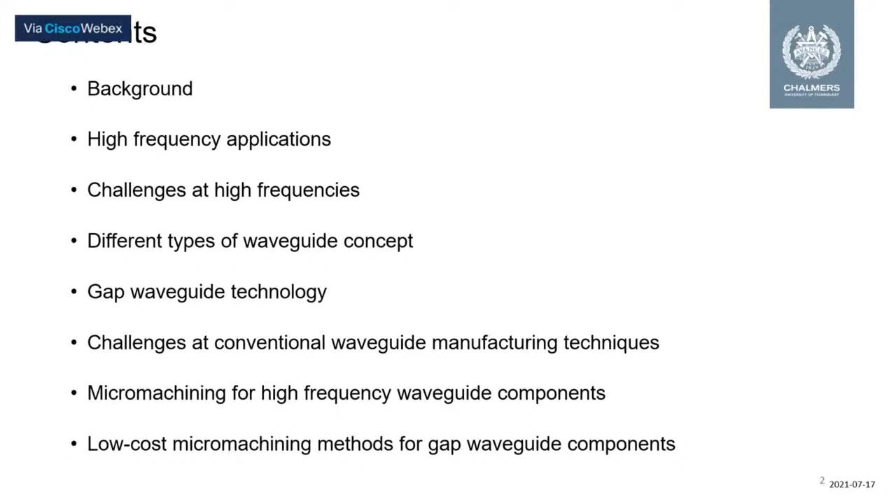So, Internet of Things. This has become a very hot topic these days. By Internet of Things, we mean devices connected to each other and connected to the internet. The number of devices connected to each other and to the internet is growing day by day. The present situation is an enormous number of connected devices, enormous growth in data traffic, and profound impacts on daily lives and social activities of human beings.

But the challenge is that the RF spectrum is already crowded at microwave frequencies. At the same time, there is a wish list from consumers: we want low cost products, compact and smaller wireless modules that we can carry everywhere and anywhere, high reliability and best performance, no limit on data rate, and connectivity everywhere.

So we can see that there is a contradiction between the present situation and the consumer's wish list. To get connectivity everywhere and to control these enormous devices connected to the internet, we see that microwave frequencies are kind of overcrowded. That's why we are approaching towards higher frequencies.

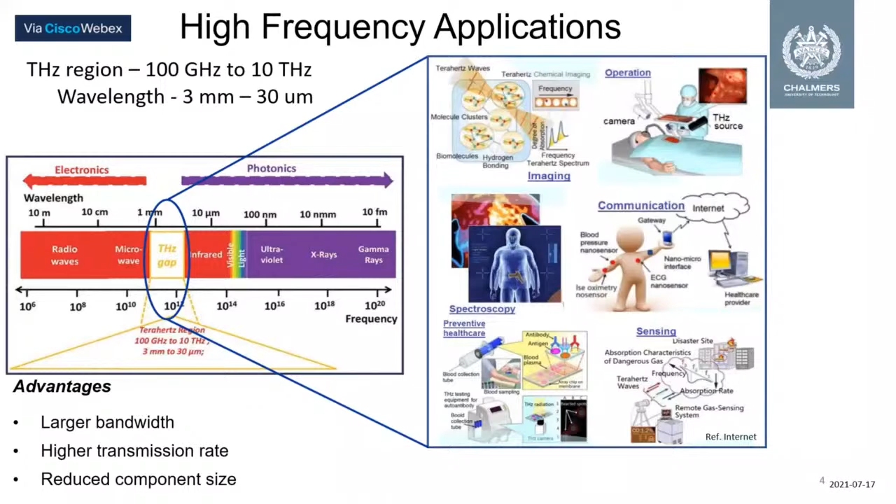But as soon as we move towards higher frequencies, we start to use waveguides to transmit waves. The most commonly used or very known waveguide is the hollow waveguide, which is rectangular or circular waveguide. People working with these transmission lines know that we have this rectangular waveguide and hollow waveguide everywhere in our measurement labs. It's a very established technology.

It offers very low insertion loss, but the challenge starts when we approach higher frequencies. Because this hollow waveguide needs very good electrical contact and alignment between metal split blocks, it becomes very challenging for conventional machining methods to get this type of electrical contact and alignment, which makes this waveguide technology very complicated and costly.

There is another very known waveguide concept, which is planar transmission line. The most commonly used planar transmission lines are microstrip lines, and we are also familiar with coplanar waveguides. They are very simple to manufacture, planar, and a very low cost technology.

But the problem is, at higher frequencies, it suffers from dielectric material. This dielectric loss is very high at high frequencies, and it also suffers from conductor loss due to narrow lines on thin substrate.

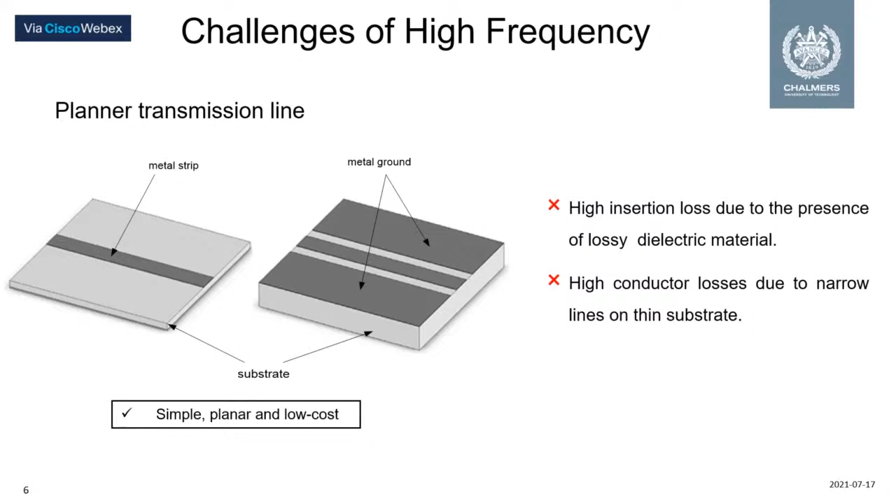After that, considering those issues, there has been developed another waveguide, which is substrate integrated waveguide or post-wall waveguide. So instead of connection between two metal plates, this waveguide technology uses metal vias to get a connection between these two metal walls. But this waveguide technology is mostly dependent on dielectric material and also suffers from dielectric loss.

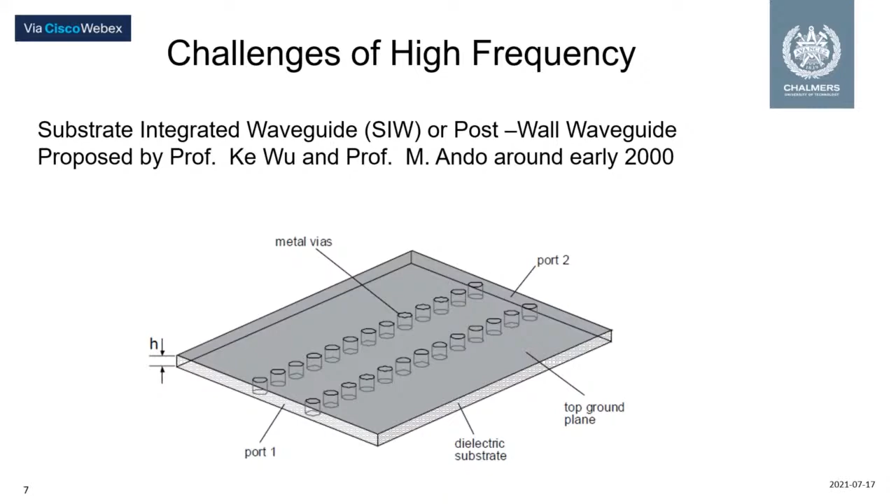So there are some issues: the waveguides that can offer low insertion loss become very costly and complicated to fabricate, and on the other hand, the waveguides that are very simple to fabricate suffer from high insertion loss, which is very difficult to use for higher frequencies.

So then the newly proposed waveguide concept is gap waveguide technology. It was proposed by Professor Per-Simon Kildal in 1988. He actually proposed this waveguide technology based on hard and soft surfaces.

So what is a soft surface? A soft surface is a corrugated surface which can stop the wave from propagating. So if a wave tries to propagate in the transverse direction, it will see some discontinuity between this ridge line, and then it cannot propagate in this direction. But in the longitudinal direction, this wave can propagate easily, and in this direction, this soft surface acts as a hard surface, which can be used to propagate a wave.

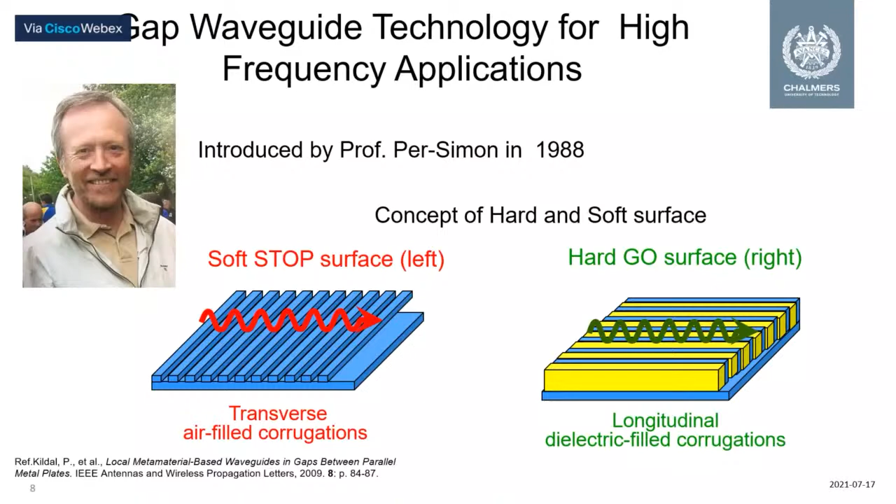So this is the main concept of gap waveguide technology. But there is some other concept also being used, which is a very basic theory of electromagnetic wave.

If we consider an electric conductor, then electromagnetic wave cannot pass through an electric conductor, but it will reflect. Any electric field that touches an electric conductor must be perpendicular to it. On the other hand, a magnetic field close to an electric conducting surface must be parallel to it. And the rule is completely opposite for a magnetically conducting surface.

But it is difficult. So then, from this concept, think about this parallel plate configuration: if we bring an electrically conducting surface and a magnetically conducting surface placed parallel to each other, then no wave can propagate through them due to this boundary condition. But it is difficult to get the perfect magnetic conductor in nature.

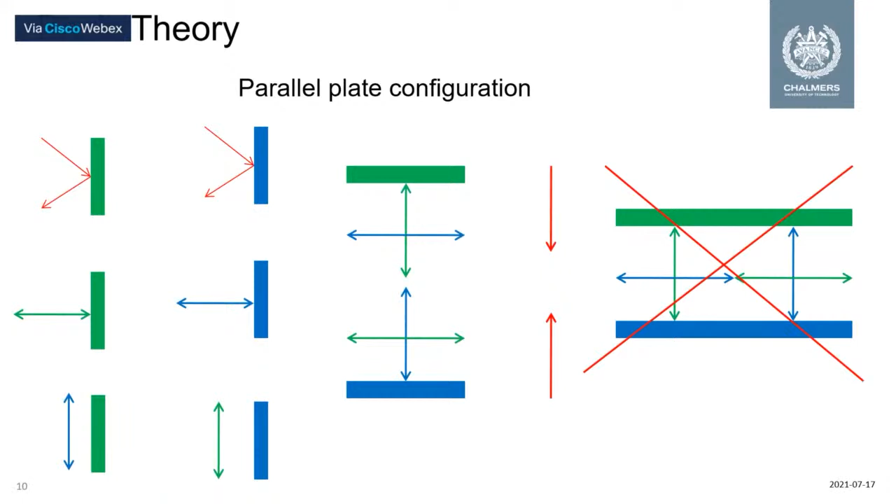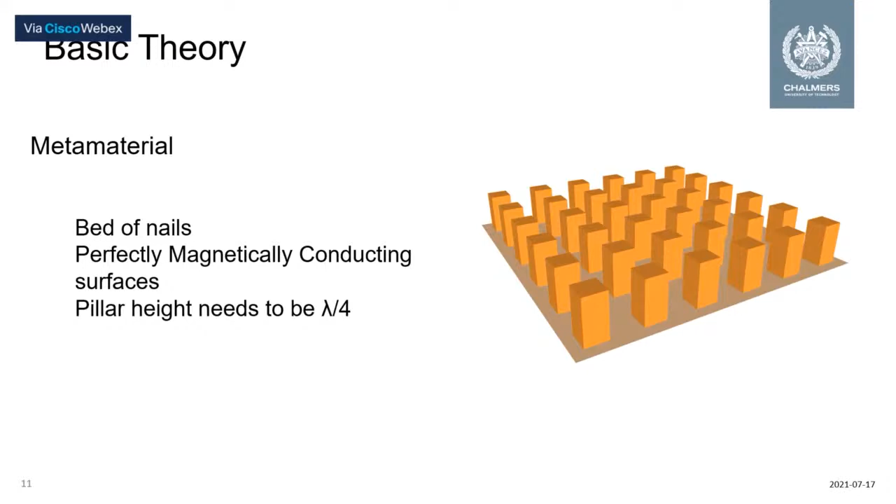But that can actually be fulfilled by a metamaterial concept. A metamaterial is a surface where continuous rows of pins can be placed at a certain distance, and the pin heights need to be a quarter wavelength. Then this surface can act as a magnetic surface.

Based on this concept, he proposed the gap waveguide concept. If we place a perfect electric conductor and an artificial magnetic surface parallel to each other with a separation less than quarter wavelength, then no wave can propagate.

But if we put a metal strip in between these two magnetic surfaces, then the wave can propagate only through this strip. As mentioned before, this metamaterial surface acts as an artificial magnetic surface, and this pin structure acts as a soft surface. So no wave can propagate through this direction, only through this ridge.

The benefit of the gap waveguide concept is it doesn't require any electrical connection between these two metal plates, because due to the soft surface, there will be no wave leakage. Wave can only propagate through this ridge. So as it doesn't require any electrical connection between the top and bottom metal plates, it has manufacturing flexibility.

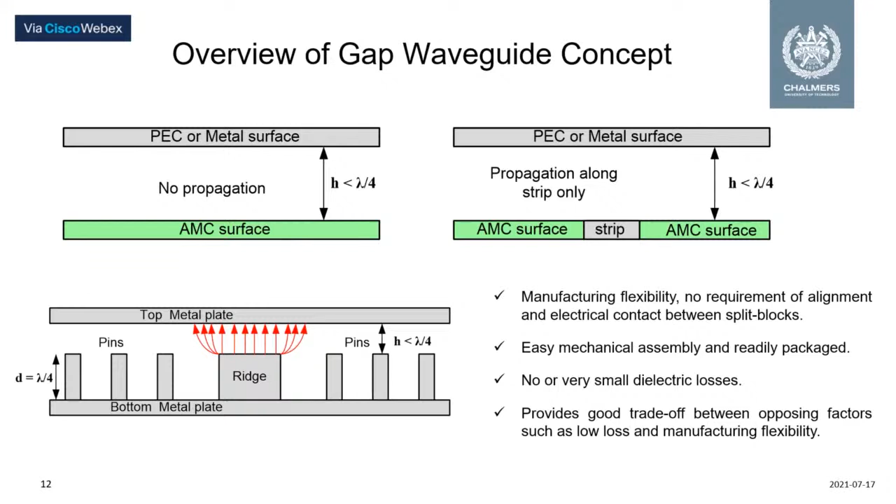Also, it doesn't require a very strict alignment. So the manufacturing is very flexible, easy mechanical assembly, and readily packaged. No or very small dielectric loss is suffered by this gap waveguide structure, as the wave basically propagates through air. Also, it provides a very good trade-off between opposing factors, which are low loss and manufacturing flexibility.

In my research, I mainly focused on ridge gap waveguide and groove gap waveguide.

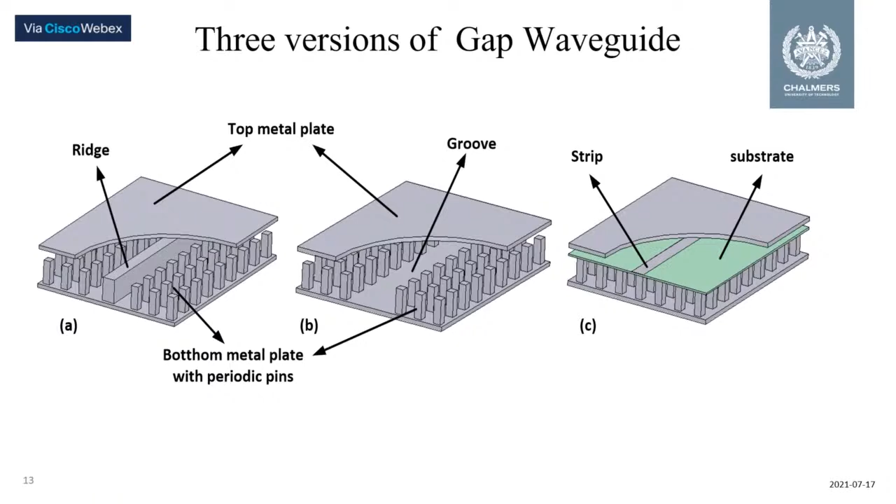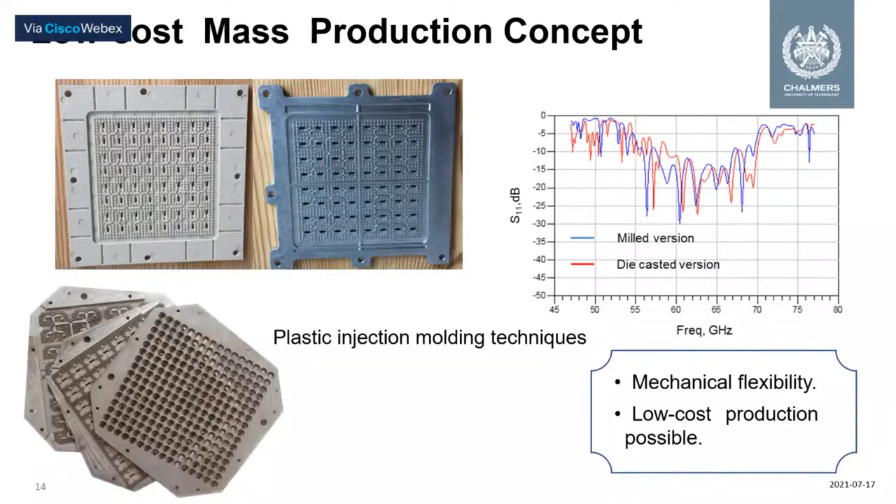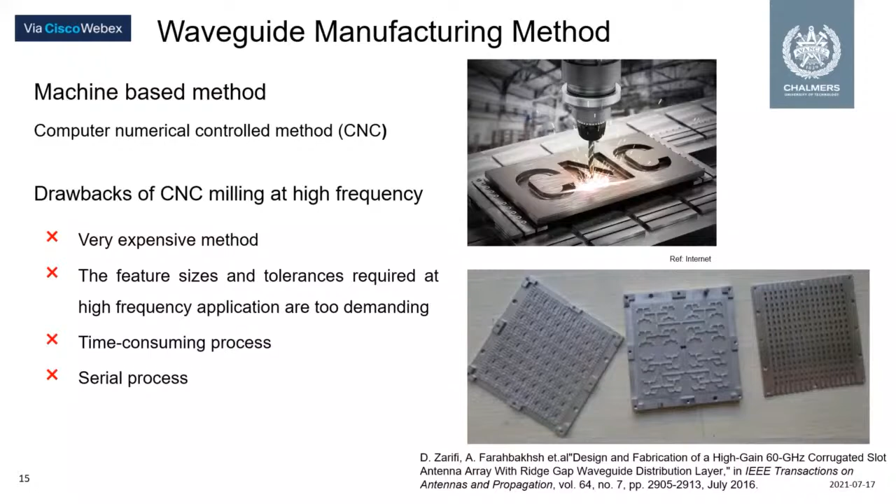Feature size and tolerance required at high frequency applications become too demanding, which is very difficult to handle by these machines. It becomes a very time-consuming process also, because it's a serial method, and we can only produce one single piece of waveguide component in a single run. So if we consider batch fabrication, this method becomes very expensive.

Now, if we think about micromachining, it's a process where we fabricate miniaturized pieces, especially at micrometer or nanometer scale. It has become very popular for semiconductor industries, microfluidics, sensors, and actuators.

The benefits of using micromachining are that they offer feature size and tolerances down to the micrometer level. The surface roughness is down to nanometer scale. It can give very high aspect ratio geometries. It has very high alignment accuracies, and volume manufacture is possible.

You can fit as many pieces as possible in a single run, and have a similar number of devices in a single run. It has high product uniformity, because you can fit many pieces in a single run, and all the pieces you get perform similarly. So it has high product uniformity, which is very important for many applications.

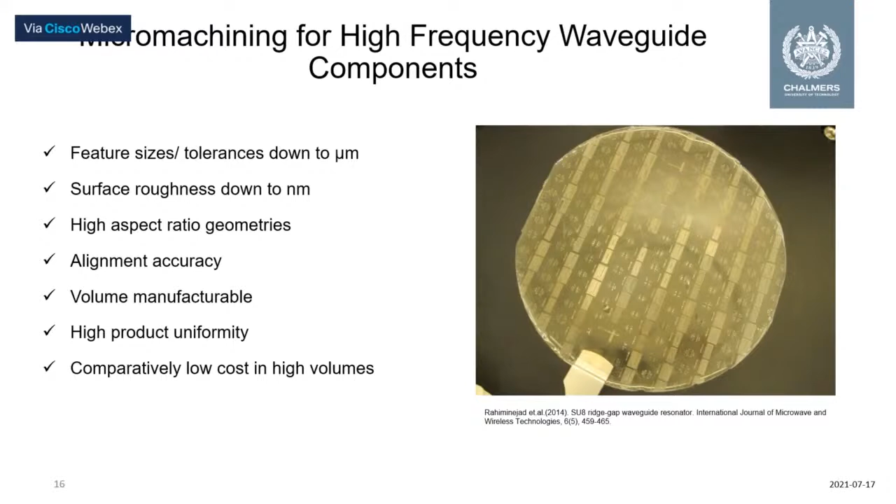It's a very good and well-established process. It doesn't require any high temperature and pressure, and also batch fabrication is possible. On the other hand, leak...

I feel like, is there any connectivity issue? Yes, sir, I also feel the same. Sir, I think we can tell her to turn off the video. Yeah, we can see. Once you hear her, please tell that. Okay, sir.

Sadia. Yes, sir. Sadia, you may write the same thing in the chat box. Sure, sir.

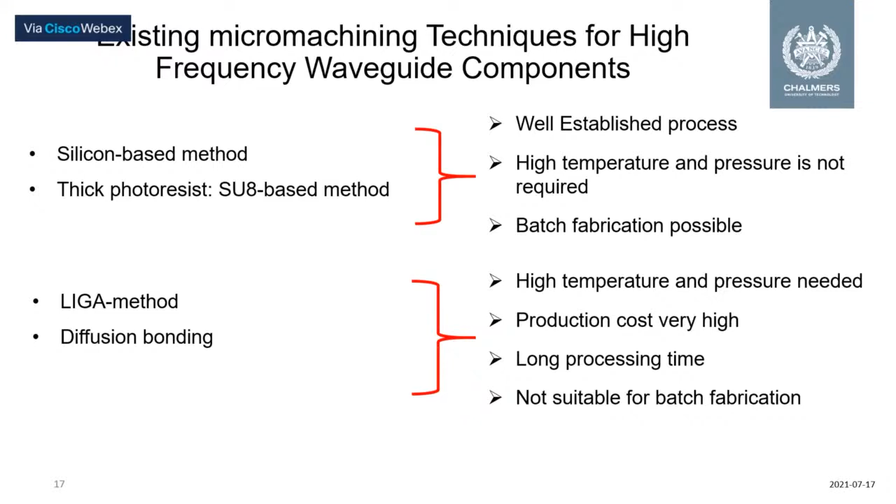Sir, should we call her? Her number is there. I think it's better to call her because she's not present in this connection. Yes, sir, I will call her. Just call her on WhatsApp maybe. Yes, that will be better, I think.

Can you hear me now? Yes, Sadia, I can hear you. I don't know when you missed my presentation. Can you open your presentation? It is not visible as of now. Let me share.

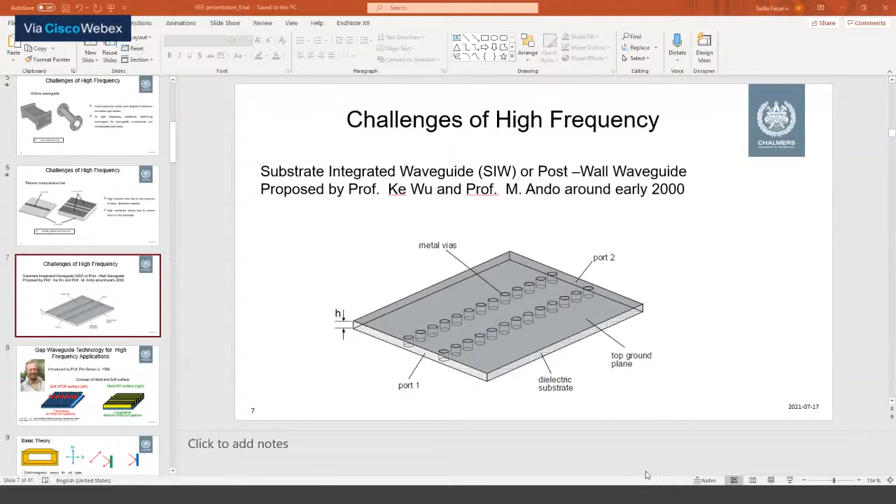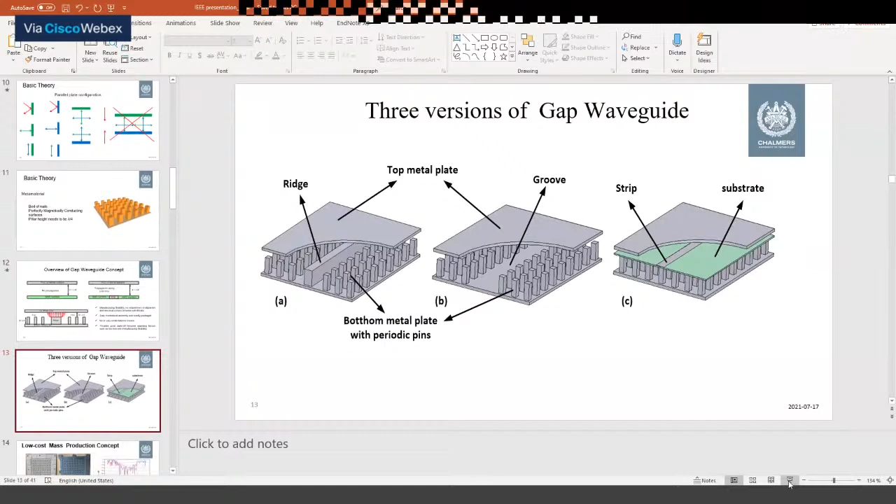Please go on. Yes, further. I think slide 17 is the last slide. Slide 17. Okay, I hope everyone also agrees with me. This is the last slide. Right. Okay, sorry for that.

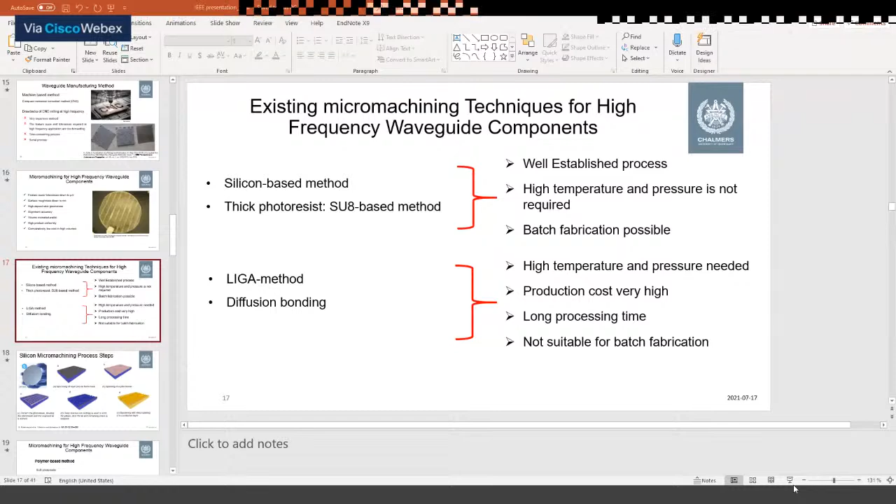Okay, you start, resume from here with your full screen view. Yeah, thank you. I'll start from slide 17. It is not in the full screen view. It will be better for us. Now make it full screen. Yeah, fine, good, okay, yes.

Okay, so the most commonly used methods to fabricate high frequency waveguide components are silicon-based method, thick photoresist-based method, LIGA method, or diffusion bonding. Due to very short time, I will not explain all the methods, but I will just talk about silicon-based method and thick photoresist-based method. As you can see, there are some issues with the LIGA method and diffusion bonding because they need high temperature and pressure. The production cost is very high for some of them. It requires long processing time also.

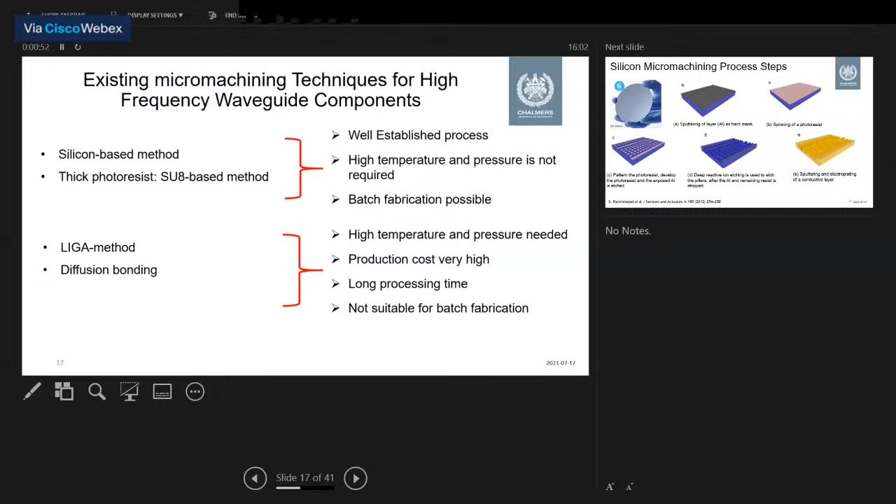This is how we process a silicon wafer. In this image, you can see a 6-inch silicon wafer, and this is for a specific processing. We sputter it with aluminum as a hard mask, spin a photoresist, and then pattern the photoresist. Photoresist is usually a material which is sensitive to UV light. So when we pattern the photoresist, we get the required pattern based on the photoresist type. For positive photoresist, the unexposed area will cross-link and the exposed area will dissolve, and for negative photoresist it's the opposite. So we pattern the photoresist and then start deep reactive ion etching to etch through the wafer. When we remove the aluminum and the remaining resist, we get the pattern. In this image, you can see the pins and the ridge. After sputtering and electroplating of the conductive layer, it's ready to use as a waveguide component.

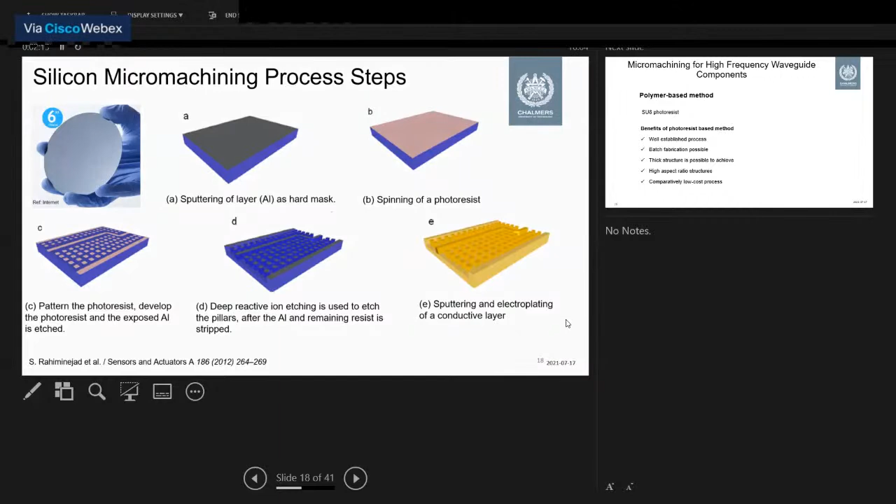If we consider polymer-based method, SU8 photoresist is most commonly used photoresist for very thick structures. Benefits of using this photoresist: it's also a very well-established process as silicon-based method, batch fabrication is possible, thick structure is possible to achieve, it can give high aspect ratio structures, and comparatively it's a low-cost process.

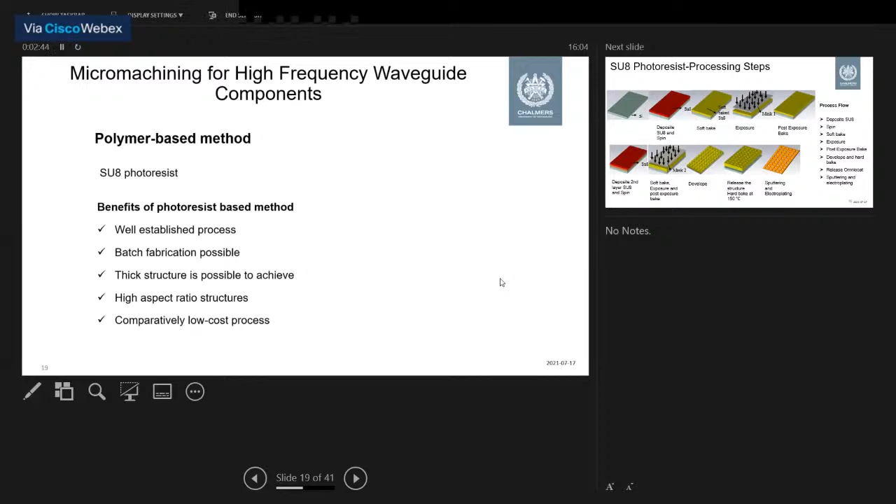So this is the processing steps. We need a substrate, and in our case, we use a silicon wafer. We deposit SU8 photoresist and spin coat it. The spinning speed determines the layer thickness that we need. Then we soft bake it. During the soft baking, the liquid of the photoresist will evaporate and we get a solid surface. And then we expose it.

For SU8 photoresist, it's a negative photoresist, so the area that is exposed under UV light will cross-link and the unexposed area will remain unchanged. During post-exposure bake, this cross-linking process actually occurs. Then we can repeat these process steps depending on the steps required by the antenna, waveguide, or filter. Once all the layers are defined, we develop the photoresist, and the developer removes all the uncross-linked photoresist. When we release the structure from the substrate, we can have the required chip. And for gap waveguide components, we need to sputter and electroplate it with a conductive layer to make them conductive.

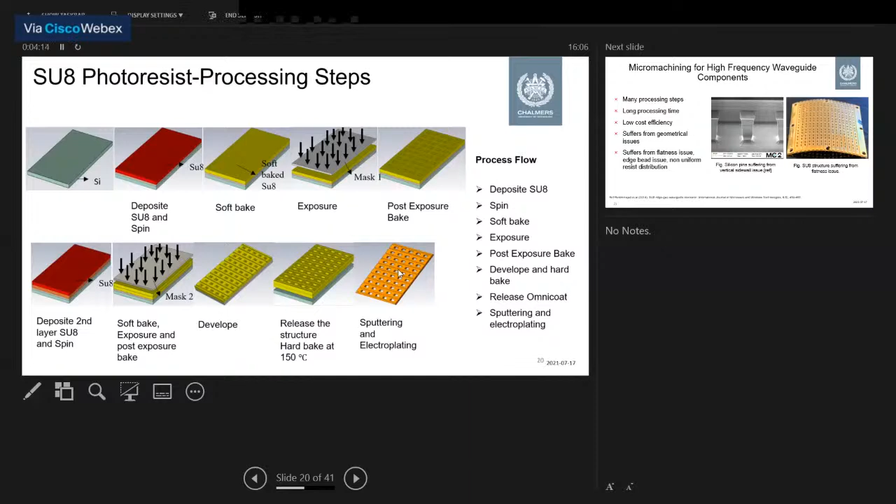If we consider the silicon micromachining and the photoresist micromachining process, we see that it requires many processing steps, long processing time, especially for the photoresist method. We need waiting time between each step, which makes the processing time very long. It has low cost efficiency because the number of devices that fit in a single wafer depends on the wafer size. And if we consider a high gain antenna, the size of the antenna becomes very big, so we cannot fit many pieces in a single run. This reduces the cost efficiency if we consider the time.

It also suffers from geometrical issues. In this image, you can see some pins which suffer from vertical sidewall issues. And in this image, you can see a bent structure, which is a very common problem for liquid photoresist. So if we want a structure which is very thick, then it suffers from this type of bent structure. Also, this liquid photoresist suffers from edge bead issues and non-uniform resist distribution.

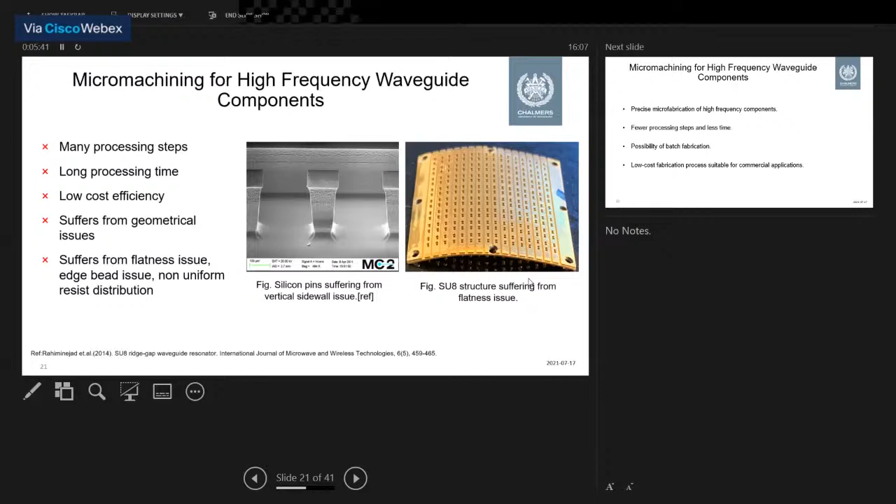So if we consider those type of issues, we actually need a precise microfabrication of high frequency components, which has fewer processing steps, needs less processing time, and possibly a batch fabrication method and a low cost process. For some applications we don't need to think about the cost of production, but for many applications we need to think about the cost, especially if we collaborate with industries - then it's very important to think about the cost of the fabrication method.

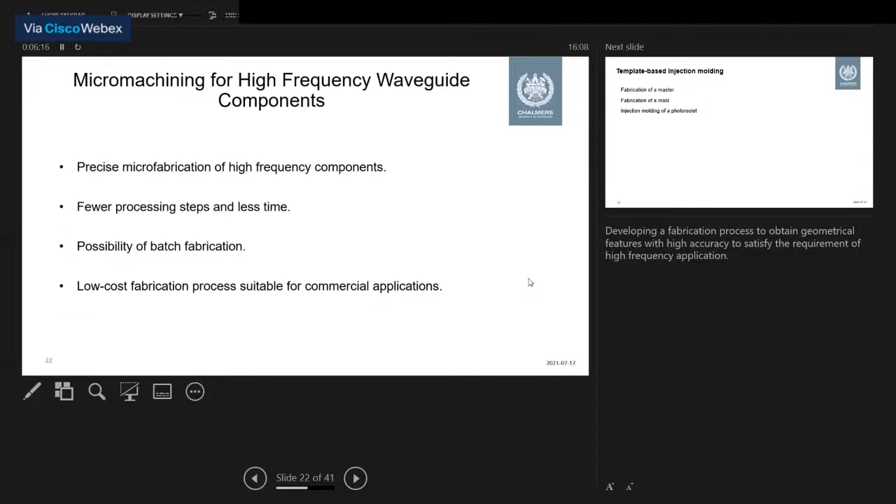So considering those issues, we developed a template-based injection molding. In this template-based injection molding method, it seems very complicated at the beginning, but finally we will see how it works and solves some issues.

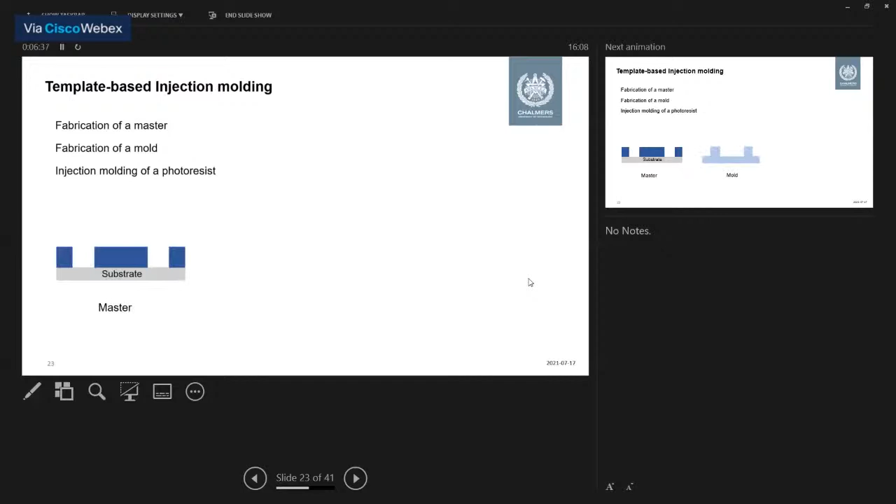So the first step is we fabricate a master. A master is a piece where once it is fabricated, it always stays there and we never remove it from the substrate and from the master. Usually a master contains the accurate or original geometry of the final piece.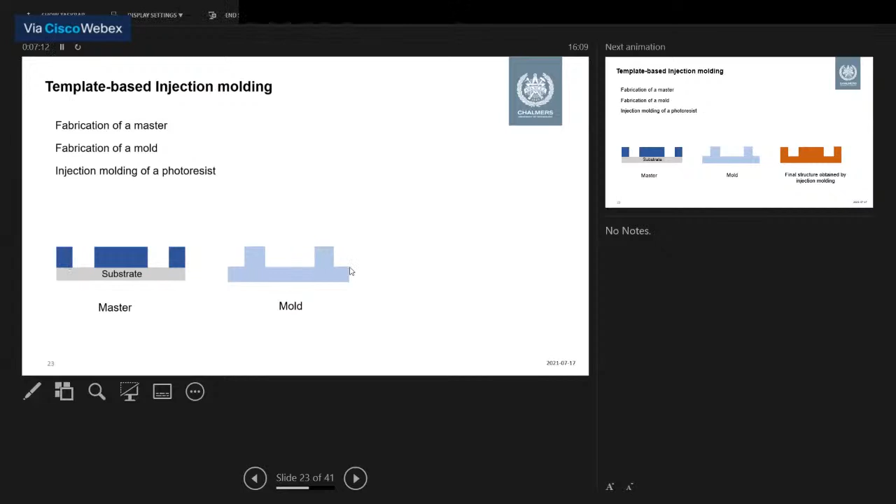Once we have the master, we fabricate a mold. The mold has the reverse structure of the master - where there is a hole, we have pins, and where we have pins, we have holes. By using this mold, we will finally get a final structure by injection molding. So I will explain the process in detail now.

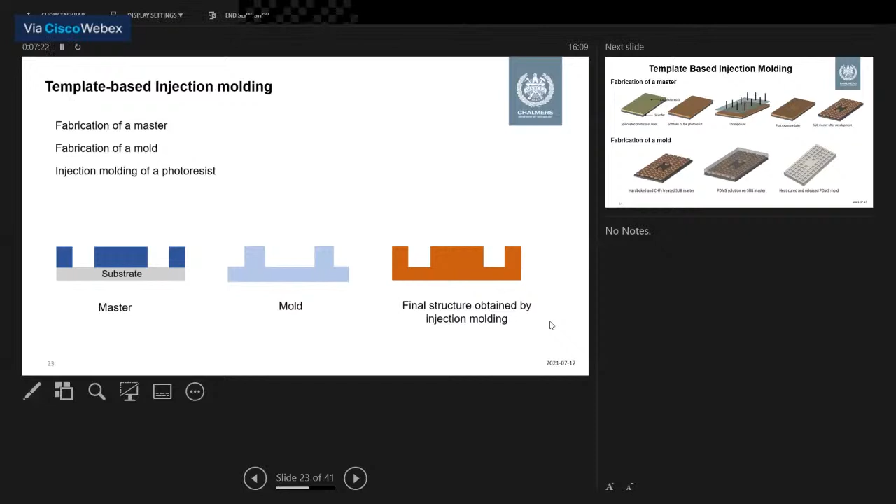First, to fabricate a master, we choose SU-8 photoresist because the antenna that we fabricate is for D-band at 140 gigahertz. So the thickness of the layers needed is very thick, and only SU-8 photoresist can provide this type of thick structure.

We repeat the process steps that I mentioned before, like soft baking, spin coating, soft baking, UV exposure. During post-exposure bake, we get some areas cross-linked and some areas unchanged. When we develop it, we get the final master.

By using this master, we fabricate a mold. But before using this master as a mold, we treat it with CHF3 to make the master non-stick, and we use PDMS to fabricate the mold. Once we pour the PDMS onto the master, we degas it, and after heat curing, we can easily remove the PDMS mold because the master is already a non-stick material.

So in this image, you can see a PDMS mold, how a PDMS mold looks. It has the opposite structure of the master.

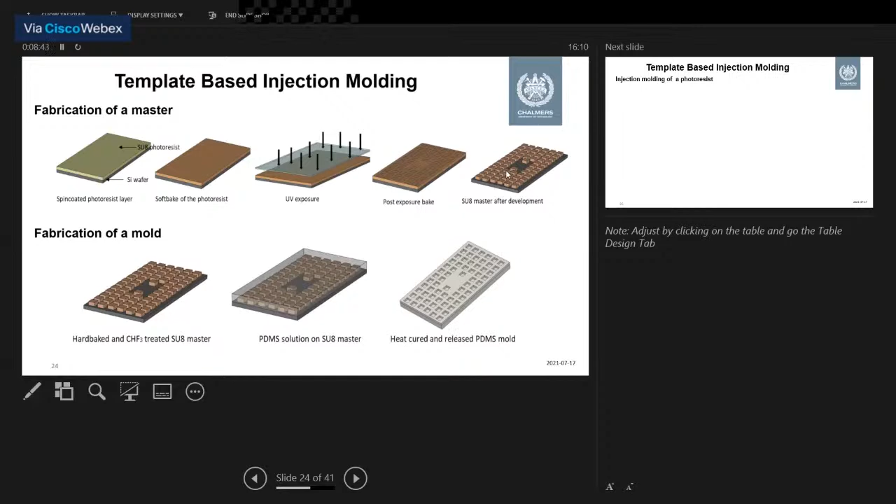And then we design an injection molding process. For injection molding, we use a newly developed photoresist called Ostemer. The benefit of using Ostemer is you can use it at room temperature, and after UV cure it becomes a soft or rubbery structure that can be easily released or removed from the substrate. Then when you heat cure it, it will get the final stiffness. So this is how we plan the injection molding process.

For injection molding, we use an aluminum mold, which has two holes. When we place the previously fabricated PDMS mold with this aluminum mold, we press them together with a glass plate and clamp them together. Then when we inject the Ostemer, we UV cure it and release it, and after heat curing, we can have this final Ostemer chip.

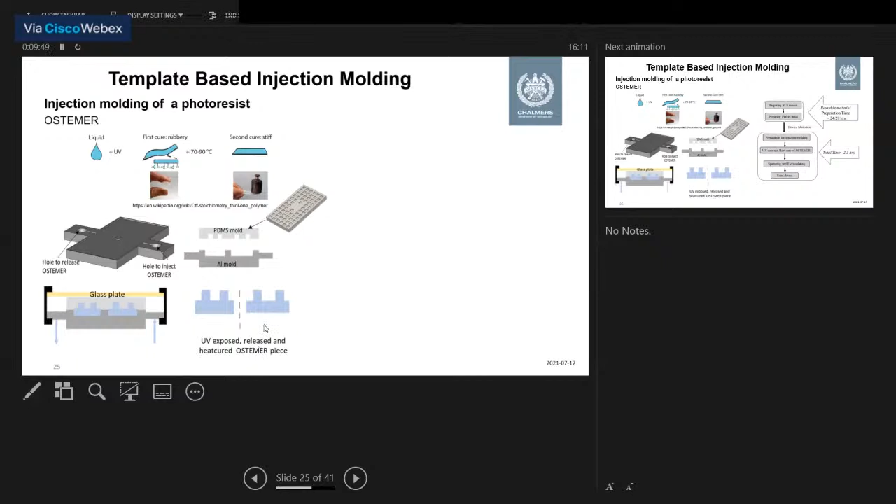So this is what the final process steps look like. If we consider preparing a master and preparing a mold, it takes 24 to 28 hours. But the benefit is that this material, the master and the mold, is reusable. For the final device fabrication, we need only 2.5 hours from injection molding to the final device.

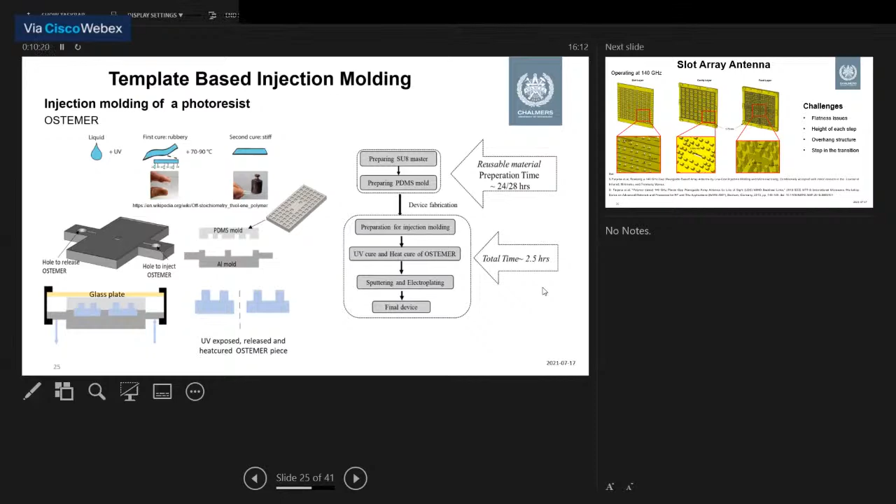Based on this method, we fabricate a slot array antenna. It operates at 140 gigahertz and has 3 layers: a slot layer, a cavity layer, and a feed layer. If you want to read more detail about this antenna, you can check the references.

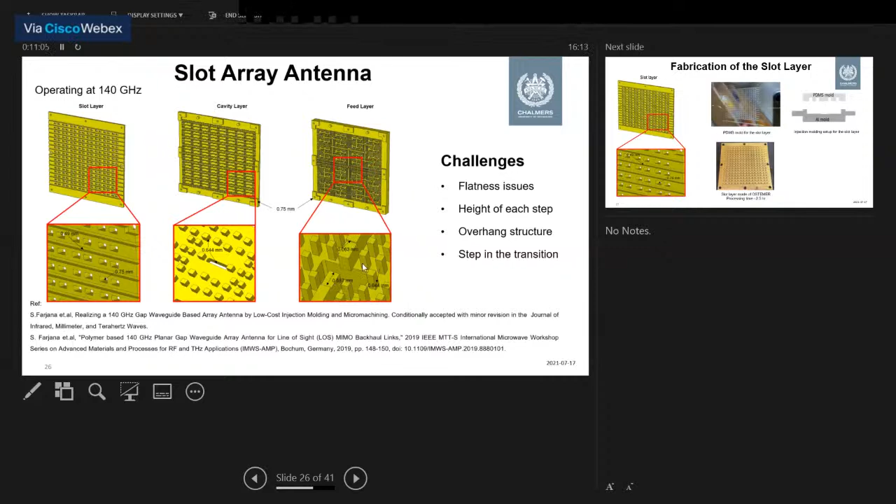The issue with fabricating this antenna is the flatness issue, because it's a very thick structure with height at each step, and an overhang structure. You can see here we need an overhang structure, which is very complicated to get with silicon micromachining or other photoresist-based methods. This small step in the transition is also very complicated to achieve by other fabrication methods.

But when we fabricate the slot layer, we can easily transfer the slot layer into a SU-8 master, and then transfer it to the mold, giving us this Ostemer slot layer. In these two images, you can see a slot layer fabricated by Ostemer and a slot layer fabricated by SU-8 photoresist. You can see the slot layer fabricated by Ostemer is completely flat.

The slot layer fabricated by SU-8 photoresist has a bend, unlike the flat injection molded version. Comparing processing time, it takes only 2.5 hours to fabricate a slot layer by the injection molding method, whereas fabricating a slot layer with SU-8 photoresist takes a very long processing time.

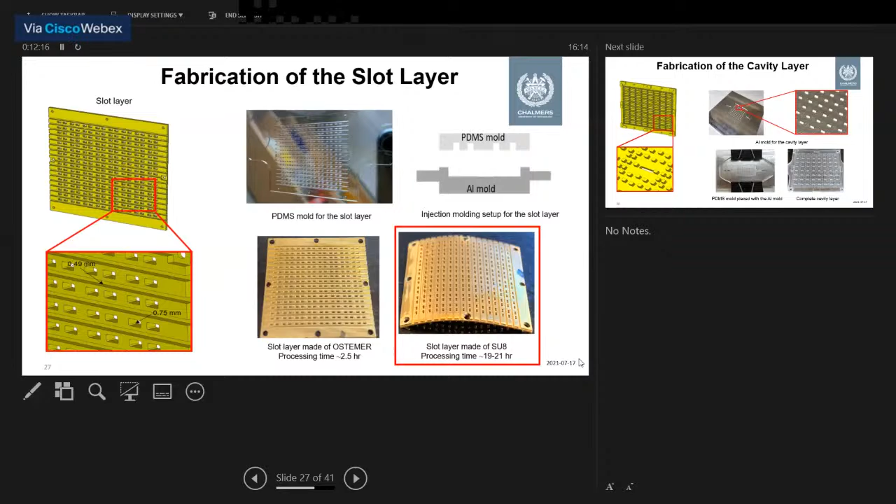By following the same method, we fabricate the cavity layer. The challenge of this cavity layer is that it has a hole. To get this hole, we design the aluminum mold with pins, and when we inject the Ostemer, the pin actually creates this opening. Here you can see a complete cavity layer.

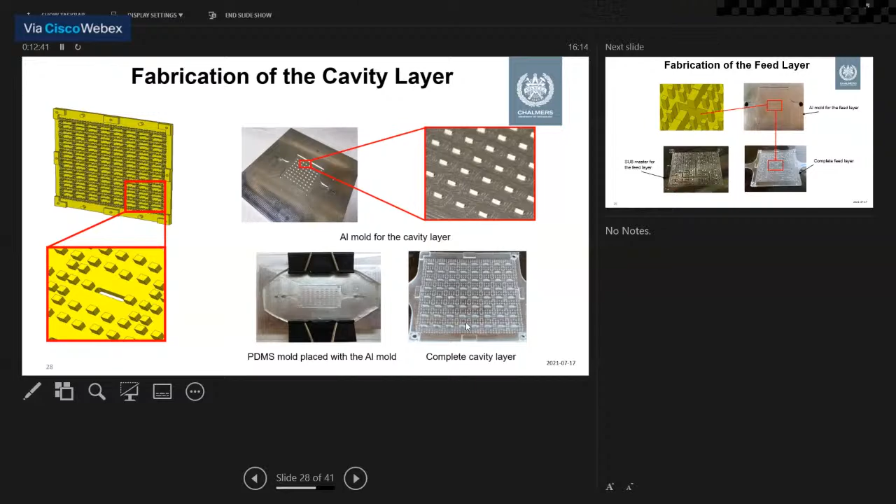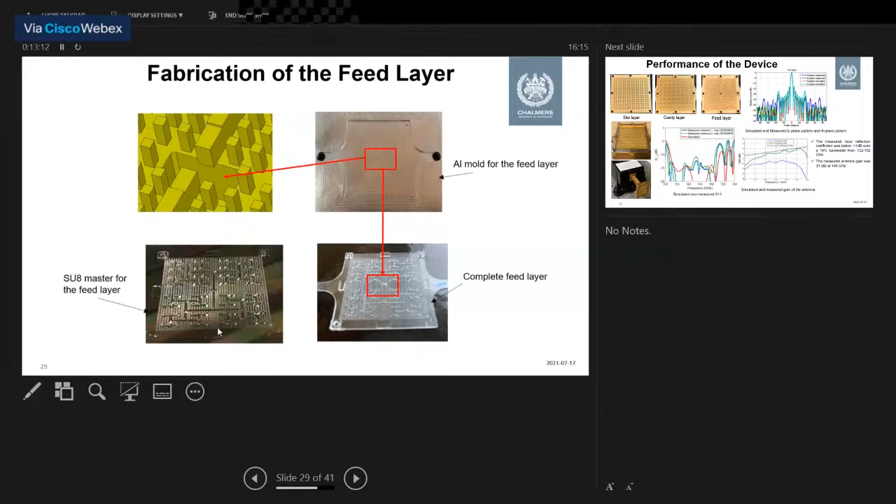In a similar way, we fabricate the feed layer, but for the feed layer we have only one pin in the middle, which creates the opening for the transition. The purpose of showing all these layers is that you can design the aluminum mold requiring the geometry that is needed, and then easily transfer the design by combining it with the PDMS mold.

So these are the fabricated pieces: the final slot layer, cavity layer, and feed layer. From the measurement result, the measured input reflection coefficient was below -11 dB over 14% bandwidth, and the measured gain is 31 dBi, which is very good at this frequency range.

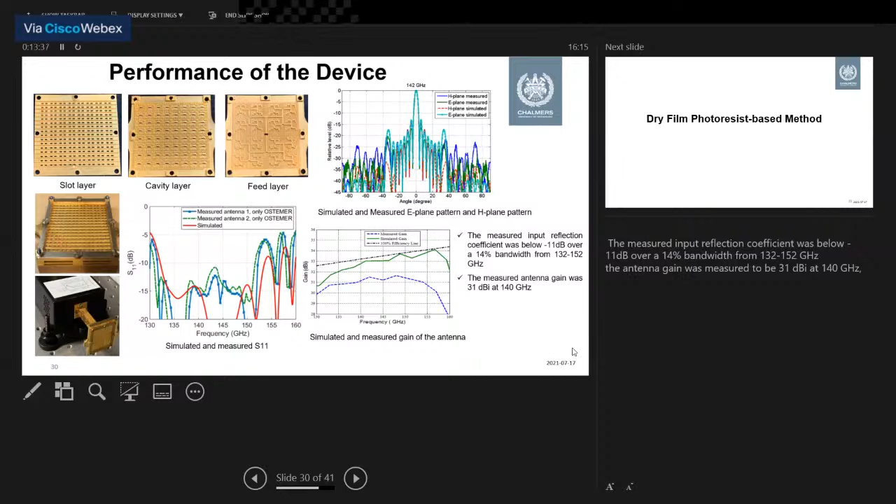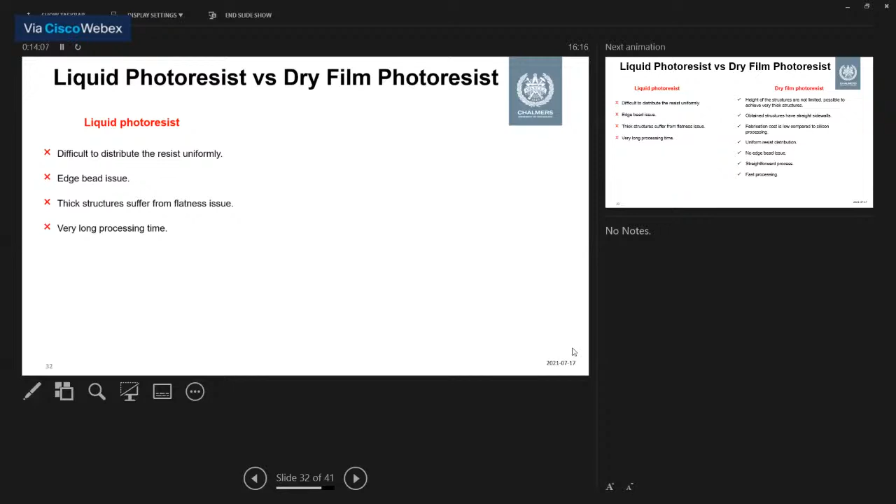But when we use this SU8 photoresist, we face some issues or complications. That's why we think about another photoresist, the dry film photoresist. The challenge of using liquid photoresist is that it's difficult to distribute the resist uniformly. It has an edge bead issue, which affects the final exposure dose. Thick structures suffer from flatness issues, and processing time is very long.

But if we consider dry film photoresist, it can overcome all those issues easily. The height of the dry film photoresist is not limited to any extent, because you can just laminate one layer after another and get a very thick structure. The sidewalls are very straight for dry film photoresist, as I'll show you later. Fabrication cost is comparatively low compared to silicon processing, and it overcomes all those issues we suffer from when using liquid photoresist.

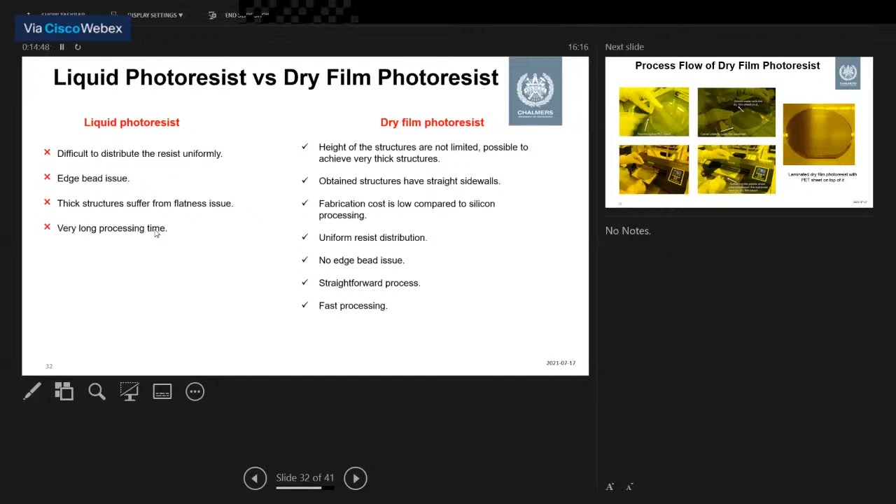So this is the process flow of dry film photoresist. Dry film photoresist comes as a paste combined with two plastic sheets. We first need to remove the plastic sheet and have a substrate ready. We put the uncovered part on the substrate and laminate it through a normal office laminator. Here you can see a laminated dry film photoresist with the PET sheet on top, and it's very flat and laminated perfectly.

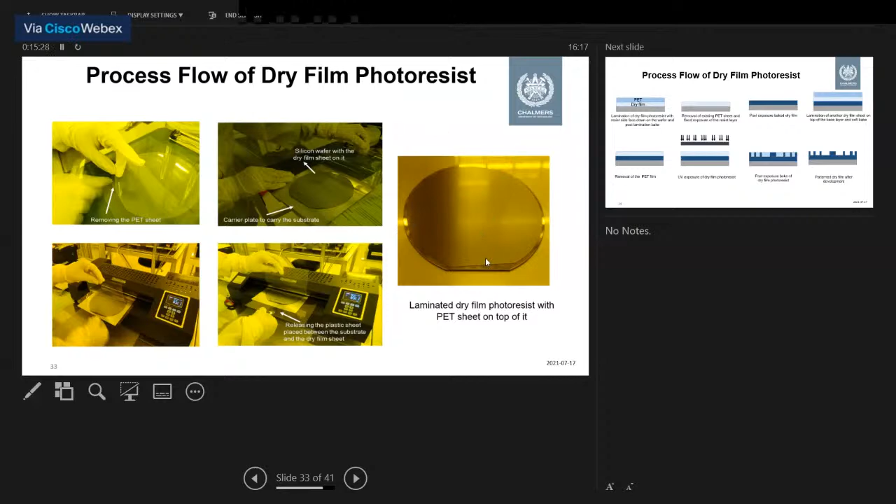The processing steps are: remove the plastic sheet of one side and laminate it onto a substrate. Remove the plastic sheet or PET sheet of the other side, then expose it with the required mask. If you want a dry film substrate, you need to flood expose it; otherwise you can just start working with it. After the lamination and flood exposure, you remove the plastic sheet and start laminating another dry film sheet depending on the thickness needed. Finally you get the final pattern of your dry film photoresist.

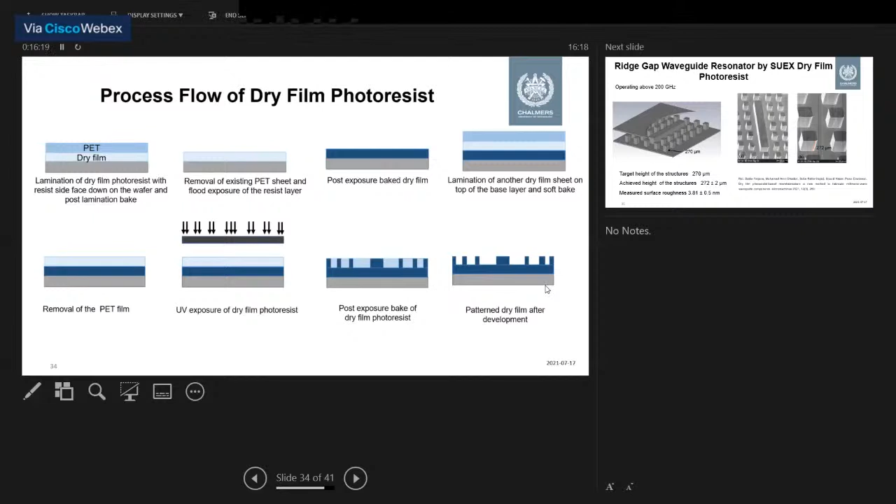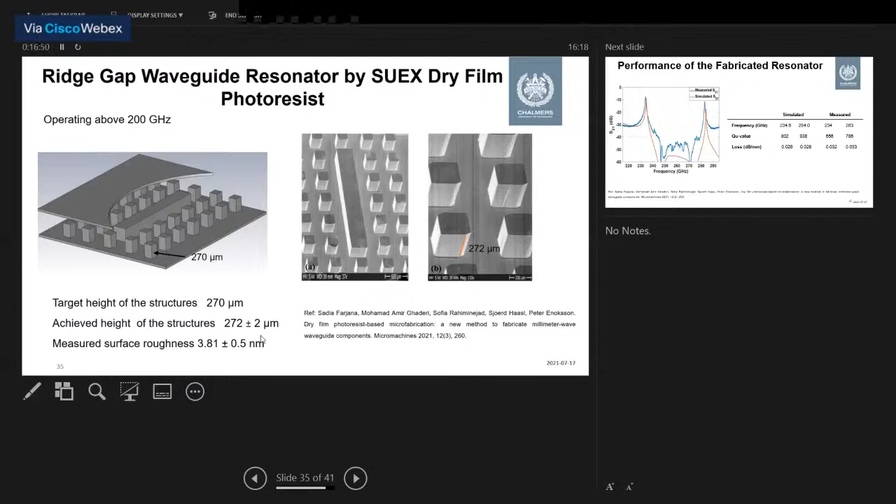Based on this process flow, we demonstrate a ridge gap waveguide resonator using SUEX dry film photoresist that can operate above 200 gigahertz. The required height of the pin was 270 microns, and from the SEM image you can see the achieved height of the structure is 272 microns, which is very good at this frequency range, and the measured surface roughness is very low for this type of structure.

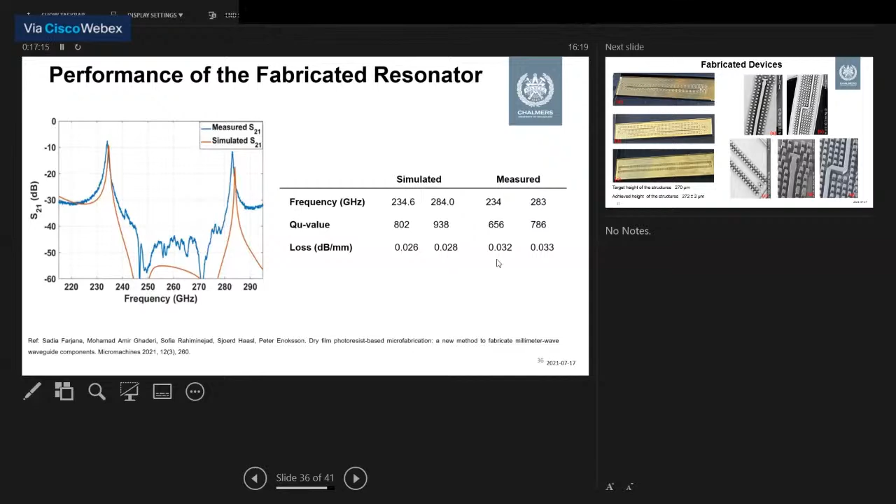From the fabricated results, or the measurement results of the fabricated piece, we see very good agreement with the simulation results, and the measured Q value is high and the loss is very low, which shows that dry film photoresist is a promising candidate for high frequency waveguide components.

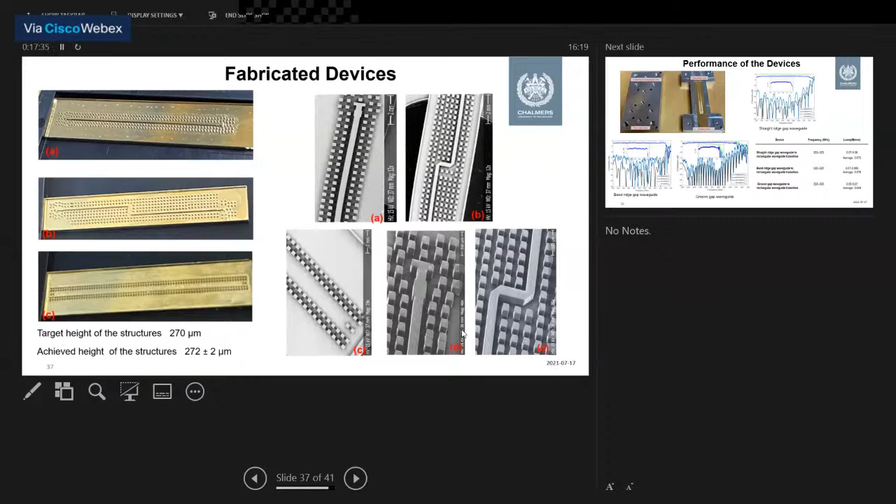That's why we fabricate some gap waveguide transmission lines using this dry film photoresist. The target height was 270 microns, and as you can see, the achieved height was 272 microns. From the measurement result, we see very good agreement with the simulation result.

We actually fabricate three different types of transmission lines. For the straight ridge gap waveguide, insertion loss is 0.075 dB per millimeter. For the groove gap waveguide, which performs similarly to a rectangular waveguide, the insertion loss is 0.048 dB per millimeter, which is similar to conventional micromachining methods. The reason to present these results is that we can use this dry film photoresist to fabricate high frequency waveguide components.

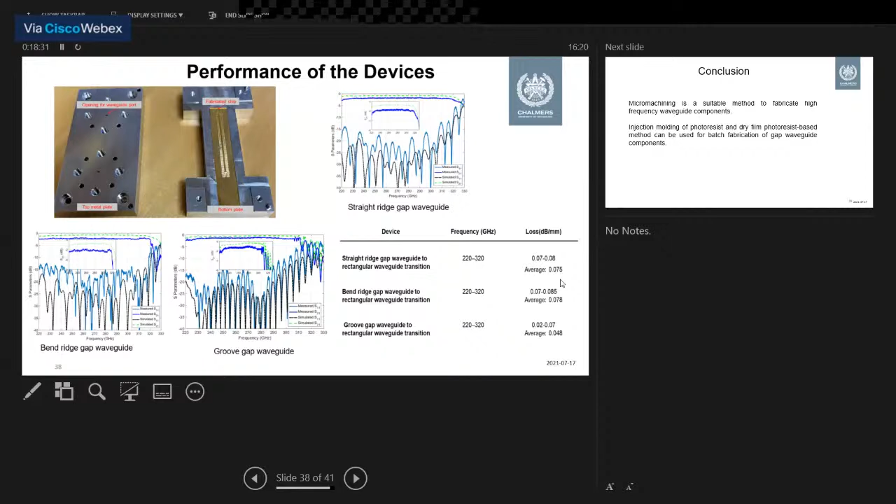The fabrication process is very simple and easy, but it can perform similarly to the very well established micromachining method.

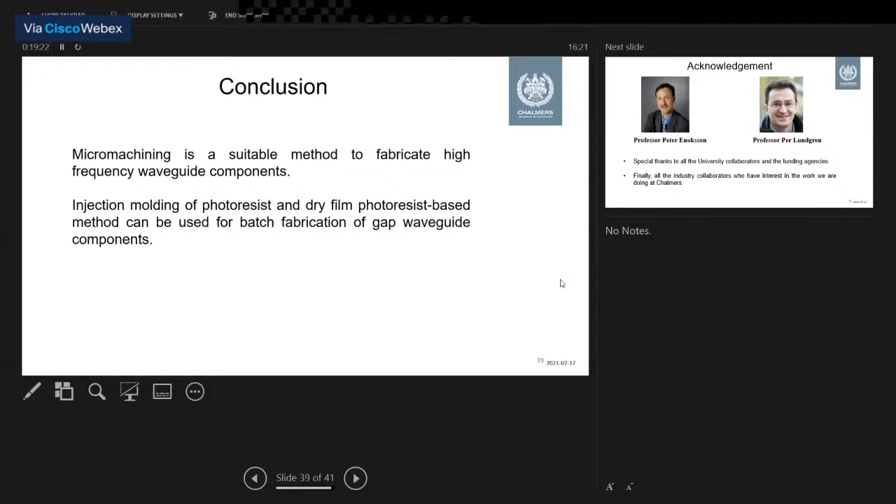To conclude, it's difficult to conclude actually within this short time, but I would say micromachining is the suitable method to fabricate high frequency waveguide components due to its huge benefit over CNC milling. The method we developed in our group, injection molding of photoresist and dry film photoresist based method, can be used for batch fabrication of gap waveguide components because the processing time is very low, and we can have batch fabrication easily by these methods.